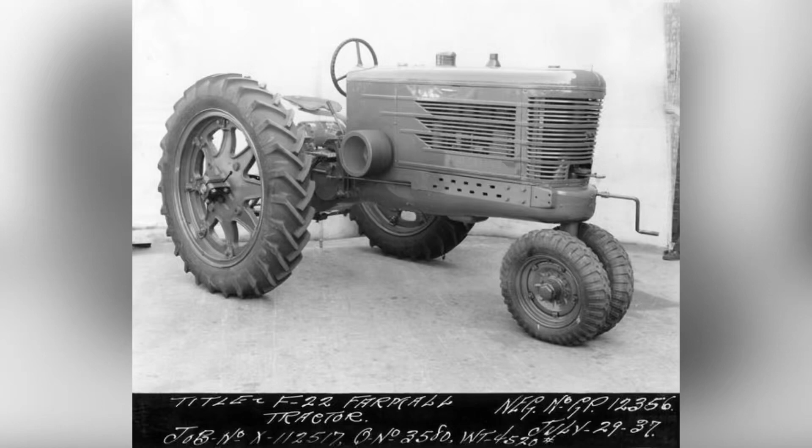Alright, so we're going to look at Farmall serial numbers today. This has been something I see a lot of. I see a lot of it online, on Facebook. People ask me, what year's my tractor? What does this mean? What does this X1 after my serial number mean? What does FBK mean? And we're going to go through all that today.

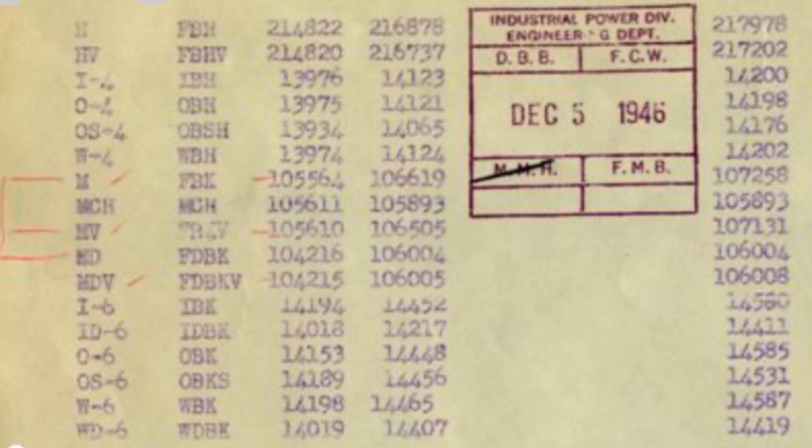So the idea of a group of tractors is you can take an engine or maybe transmission parts or wheels or something and swap it from any model within the group. For instance, you can take a motor out of a gas M and put it in an MD just by changing a few parts, or by taking a motor from a W4 and putting it in an H.

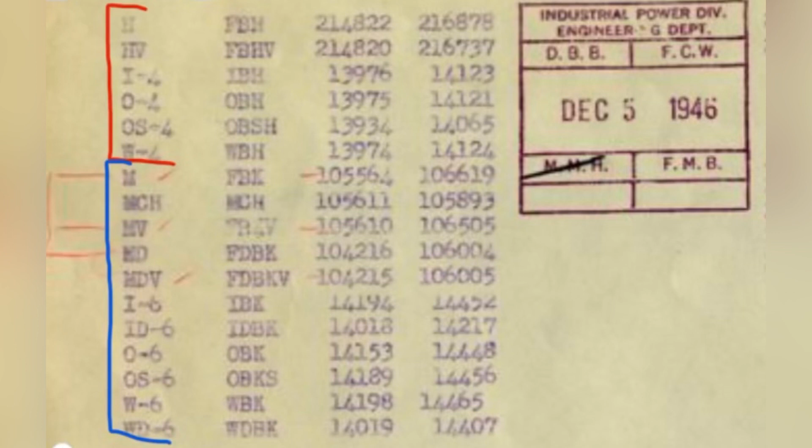So we're going to talk about 4 subgroups inside of our size groups of tractors. And I'm sure most of you know this already, but I want to make sure that everybody's on the same page as we go into this. We have row crop tractors such as an H or an M. We have standard width tractors such as an I4 or an O6 or W6.

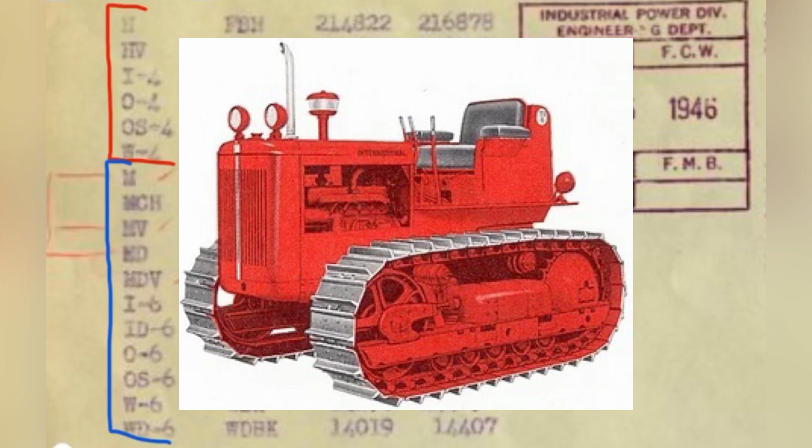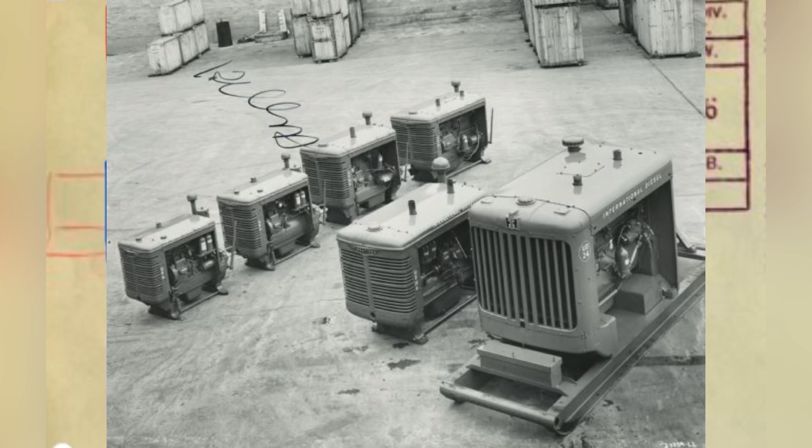We have track tractors like a TD6 or T6 or TD9. And we have industrial power plants like the U4, U6, U9, and so forth. That includes combine power plants. U motors are identical to what you find in combines. So what we're going to do is we're going to look at some serial tags like this one, and we're going to talk about them and tell you how to decode them.

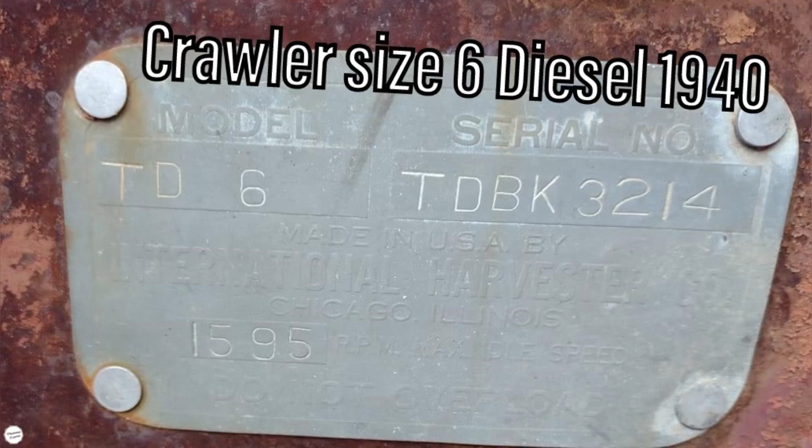So this is a T, track, D, diesel, 6 size. And then you have TDBK 3214. TDBK is the prefix to the serial number for the International paperwork that goes behind all of these, so that they could determine which models we're talking about when they start listing serial number ranges. This particular one has a 4-digit serial number that puts it squarely in 1940.

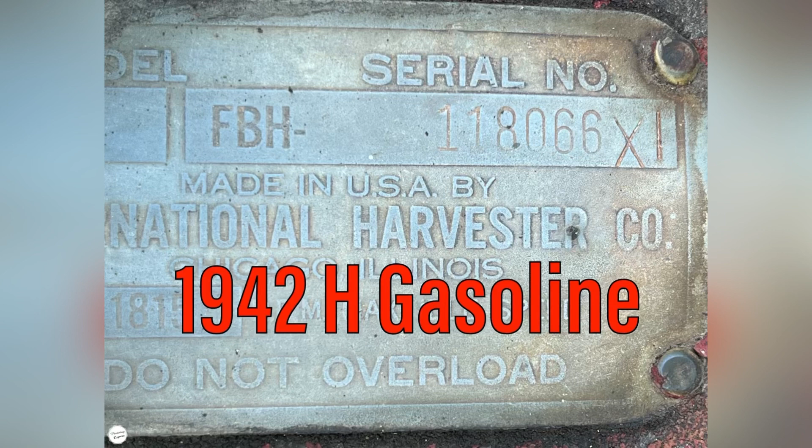So this is one of the common ones you'll see. It's FBH, then the serial number, and then X1. So FBH tells you the model, it's an H. The serial number tells you what year, 1942. And the X1 means gasoline, standard gearing, standard altitude.

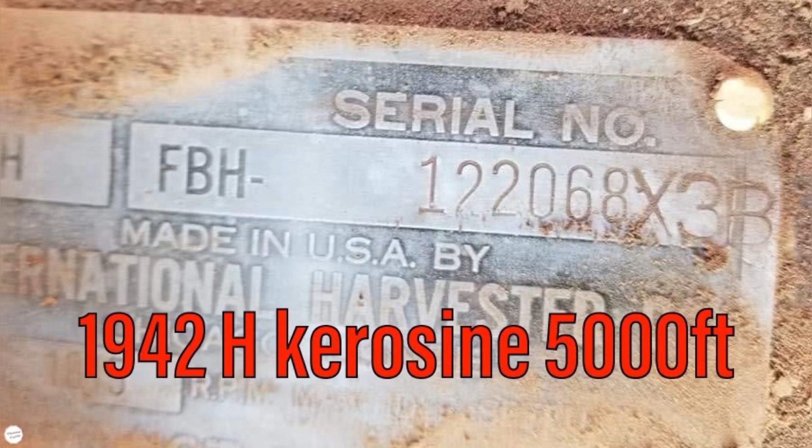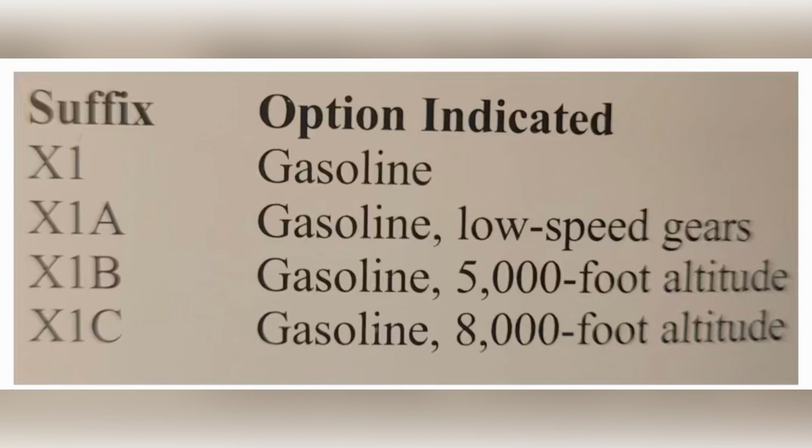You'll find gas tractors, X1 tractors, that also have the B suffix meaning 5,000 foot altitude. This list here shows the X1, X1B, and X1C for standard, 5,000 and 8,000 foot altitude, respectively.

So the tags change a little bit around '53. You end up with tags that look like this. Super M is the model. L indicates Louisville Assembly Plant. The serial number, which is 1953. And then the J is found on all Super tractors, indicating the Super clutch, as I understand it, or sometimes referred to as the Rockford clutch.

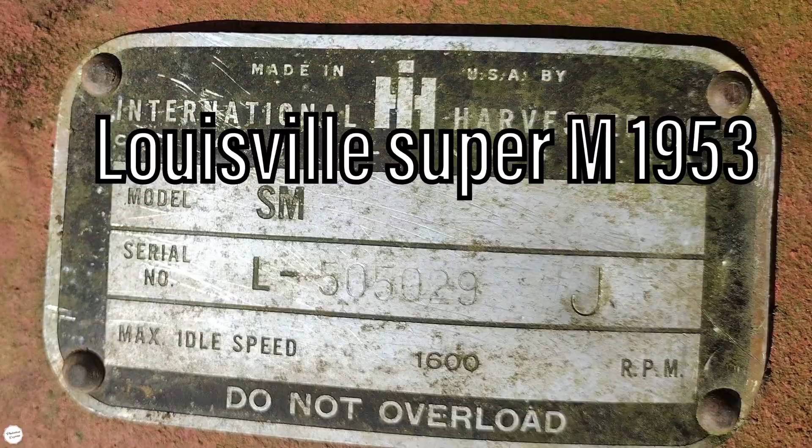So kind of the same deal here. We have Super H, serial number, and a J. Same, J means Rockford clutch. Serial number puts us as a Stage 2 Super H, December of '53.

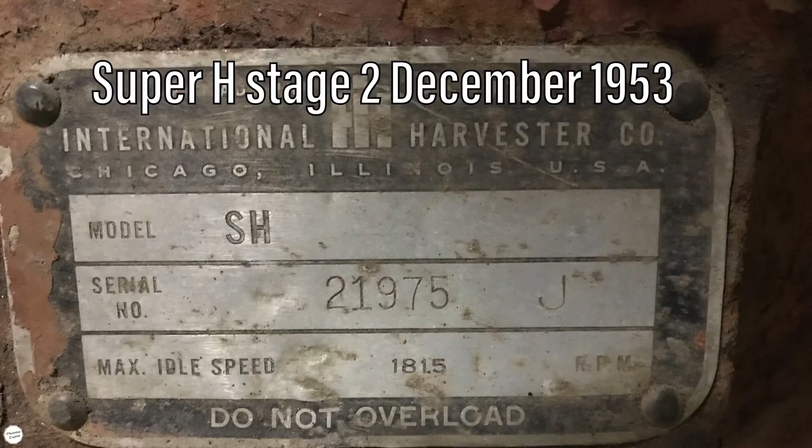So then you ask me, now Doc, how do I know what year it is? Well, you go to Google or Bing or whoever you use, and you punch in Farmall M. And then you scroll down till you find Tractor Data. Tractor Data is full of useful information about any old tractor. And then you look and see where your serial number falls in the serial number list.

So they recorded each year what the starting serial number was, and they went consecutively after that until they hit the next year. So if your serial number is, say, 95,263, then you would go, well, it's more than 88,000, but less than 105,000, so it's a 1945.

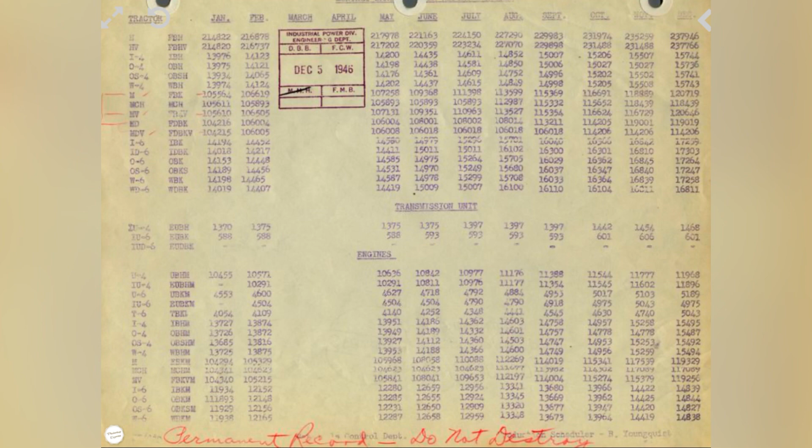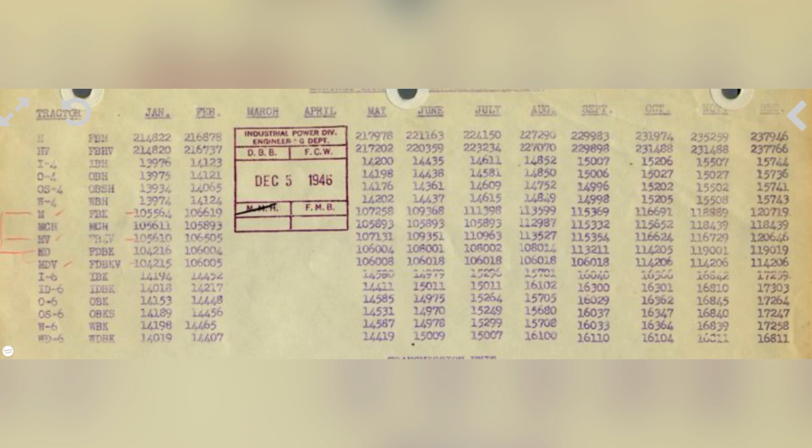But then you ask, can you narrow it down even more? I say, why, absolutely I can. The Wisconsin Historical Society has graciously posted the serial number breakdowns by month from the 20s up to, I think, the 70s. So all you have to do is find the year you're looking for, and you can see on here it's broken down by model and by month, and it'll tell you roughly when your tractor was built down to the month.

Just remember that Ms, M cotton pickers, high crops, M diesels, and M diesel high crops all share the same serial number range. And also it appears that all the 6 tractors possibly do also. So W6, I6, O6. So that means you can't directly narrow down from this list how many of each particular submodel was built.

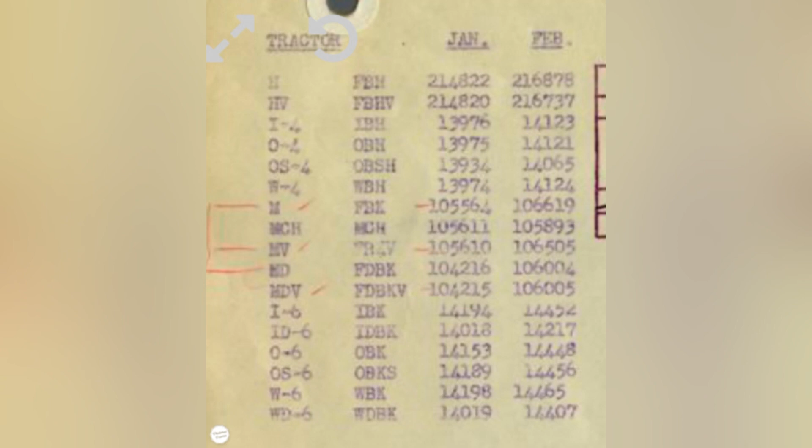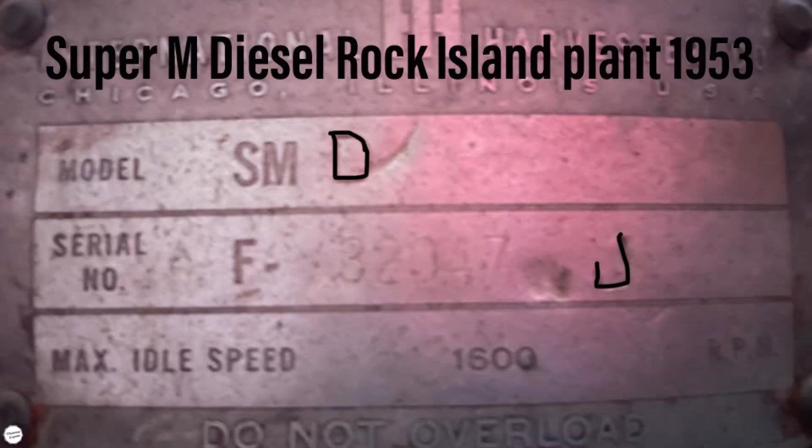But we have F, which is the Farmall plant or the Rock Island plant. And then you have a 1953 serial number. So this tag is what most people consider the holy grail of Farmalls.

This is a Super M diesel, and you have serial number for 1954, but the S is the big ticket item. That's your moneymaker. That means it's a Super MTA. As I understand it, the S specifically indicates the torque amplifier. And absence of that would not necessarily mean that it's not a Super MTA. It just may have come with the TA delete option.

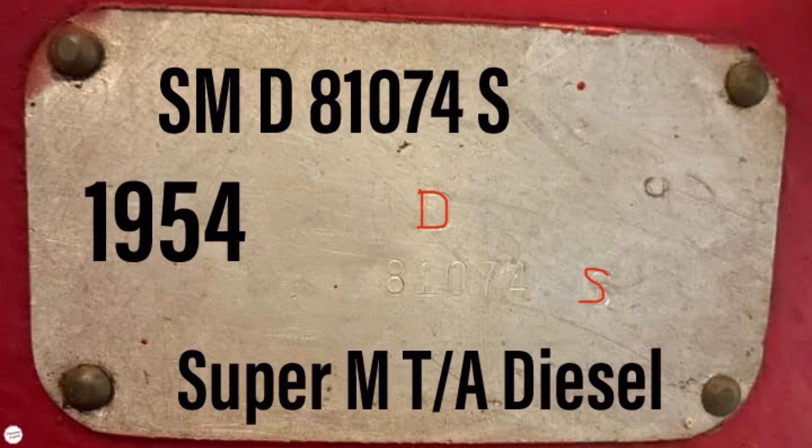This is an extremely rare tractor. This is a Super H V, meaning high crop or high clearance, serial number 23967AJ. So 23967 sticks us right in 54, so it's a stage 2 Super H. It's a high crop. A indicates kerosene, and then J is still the Rockford clutch. The owner of this tractor indicated in a Facebook post that this was possibly one of 5 produced.

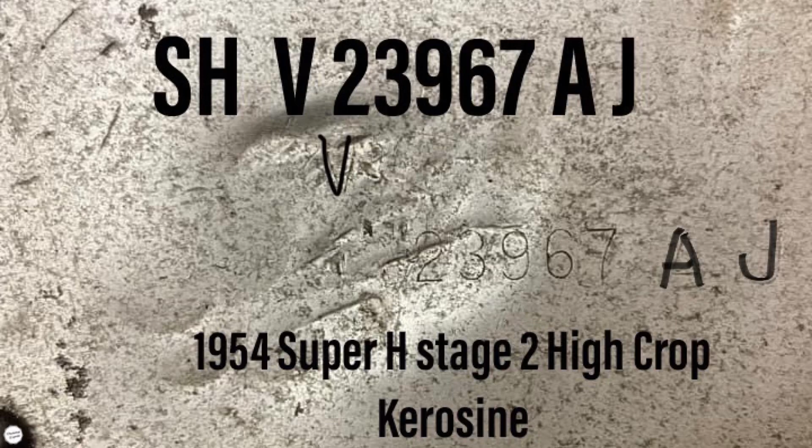I wanted to throw in some other weird stuff here. So this is a French Super C. You can see where it says SFCC, I think, which would be Super French C, and I don't know what the second C means. I'm not fully versed on these. And then it says down there 1815 RPM and the serial number.

I was hoping to find a tag from a British tractor, so we would see basically the same thing, except it would say BC or BM or BH, which would be British M. There's lots of really cool stuff in the overseas tractors, like diesel Cubs and diesel Farmall Cs and all kinds of weird stuff. It's definitely worth checking out the foreign stuff.

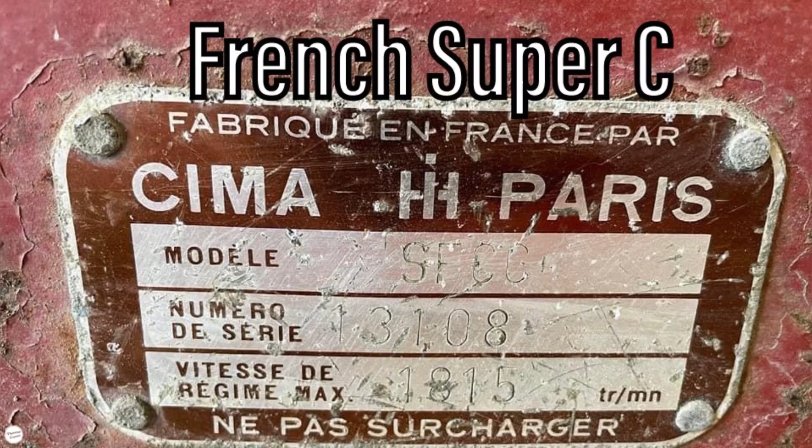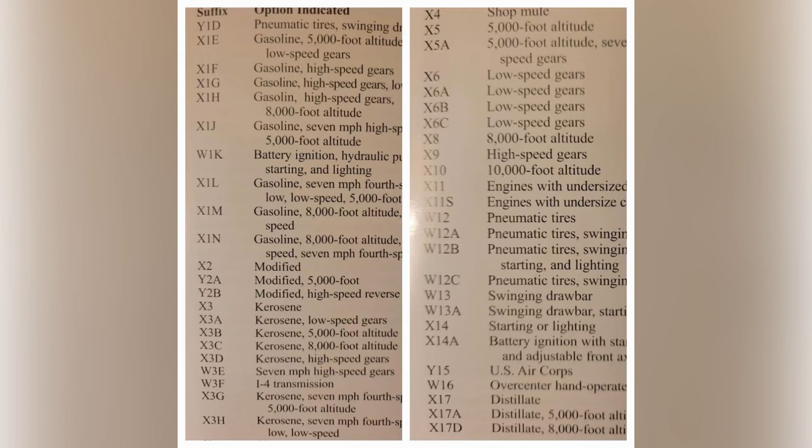So here's another cheat sheet for the suffix codes. So you got like X4 is the shop mules. You should check those out. X5 high altitude operation. X6 low speed gears. And then you have variations of that. You got all kinds of stuff in here. X17 for distillate tractors.

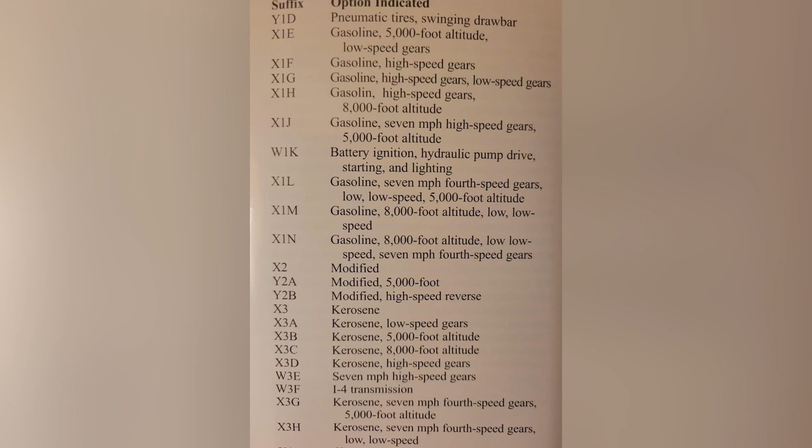Here you've got the kerosene codes, the X3, X3A, B, C. And then you've got like the high-speed gearing up there for gas tractors. There's all kinds of stuff buried in here. All right, so you already saw the top half of this, but the bottom half, this is where the cool stuff is. So I don't know what an Auburn clutch is. Never heard any references to that, or adjustable front axle heavy duty. I'm thinking maybe that's an I thing, like an Industrial 6 or Industrial 4.

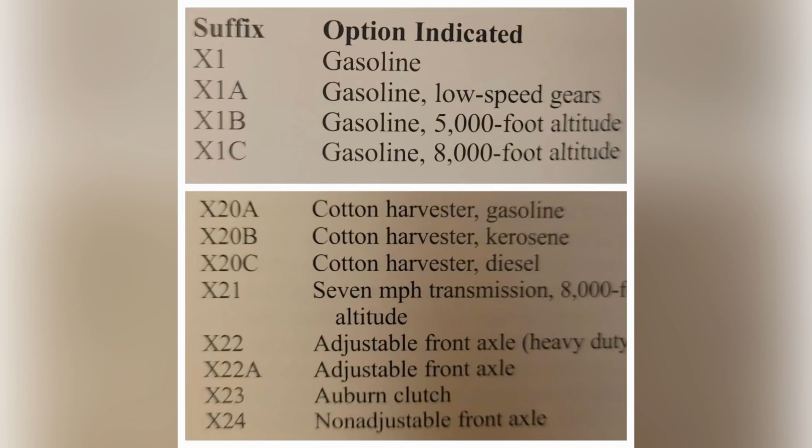So I've been doing a lot of research on these recently, and they're very difficult to find anything out about because there's so few pictures or information out there. But if you check back there in the serial number papers on the Wisconsin Historical Society, it shows MCH, M Cotton Harvester serials. They don't change for 4 months in 1946. So that means they didn't build any cotton harvesters for 4 whole months. So that indicates to me they didn't build very many of them. So I've heard people say maybe 12 a year or 10 a year.